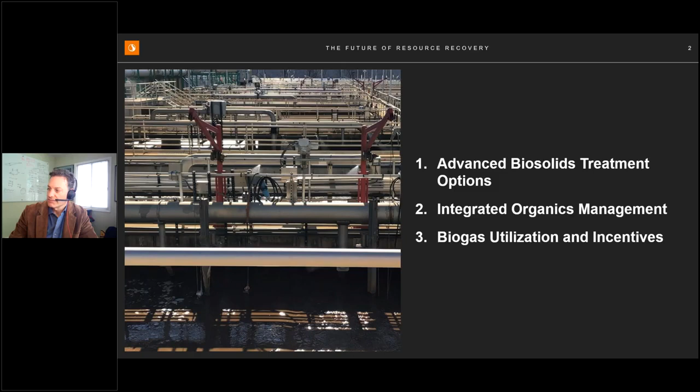Let me get to the right slide here. The topics I'll be covering include advanced biosolids treatment options, and then integrated organics management and biogas utilization and incentives market.

I want to start off with some common objectives we're seeing throughout our work on master planning and facility planning with utilities in North America and globally. One of those coincides with the topic of today's presentation: maximizing resource recovery. Within that context, achieving Class A options and looking for diversified biosolids end use options for sustainability.

Many of the utilities you operate are decades old at this point. There have been regulatory changes, capacity constraints, and many modifications over the decades, so there are space constraints, which is a common issue at these facilities. Finding space for new assets is typically challenging.

There's always the objective of ensuring effluent compliance, and understanding how the solid stream is impacting the liquid stream. Within that context, we're often looking at side stream treatment options to mitigate those impacts and ensure effluent limits are complied with and the system is as efficient as possible.

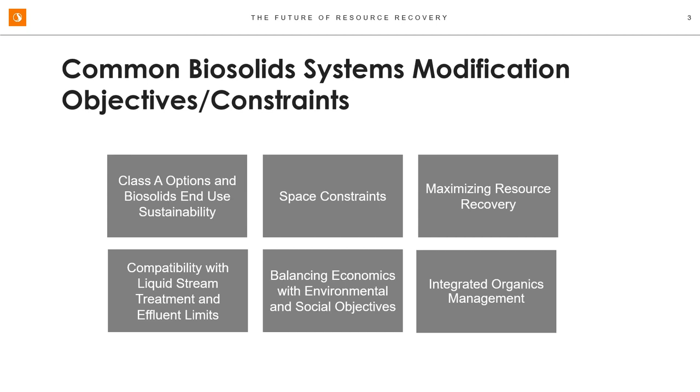As we'll get into later in the presentation, there's a very strong trend right now, some regulatory driven, some driven by the values and needs of specific urban areas, to integrate all organics, including the organic fraction of municipal solid waste like food waste, high strength industrial waste, fats, oils, and greases, and co-process those with wastewater residuals. In addition, looking at green waste that can be combined downstream as a bulking agent and so forth, for maximizing recovery of all organics.

About 12 years ago, I was involved in a Water Research Foundation study, 05-CTS-3, on waste solids reduction. At that time there was a really healthy market in pretreatment technologies looking at ways to minimize waste activated sludge and overall sludge volume by hydrolyzing material upstream. In that competitive market, many of those technologies have survived, and some have waned a bit.

What's really come to the surface over the last few years among pretreatment technologies is thermal hydrolysis and thermochemical hydrolysis technologies like thermal alkaline treatment. All of the advanced anaerobic digestion technologies are still in play for various drivers, including thermophilic digestion, biological hydrolysis or acid gas phase digestion, post-aerobic digestion, and a lot of interest, which I'll get into more later, in high solids anaerobic digestion intensification processes.

Also looking at combination processes like combining anaerobic digestion with thermal drying, composting, and thermal alkaline treatment downstream has become popular as well. We're seeing still incineration processes, also now being combined with anaerobic digestion. Post-thermal hydrolysis is something Cambi is working on now, along with emerging technologies like pyrolysis and gasification.

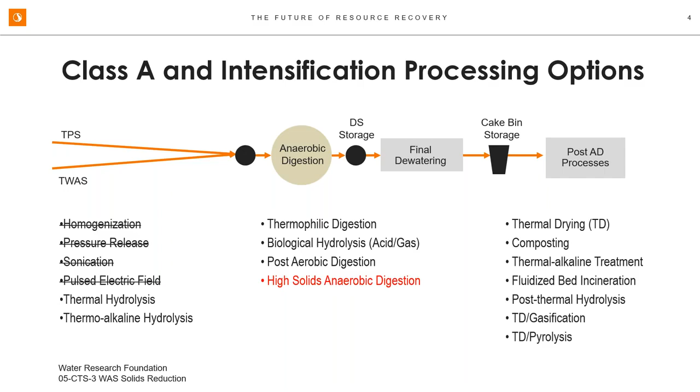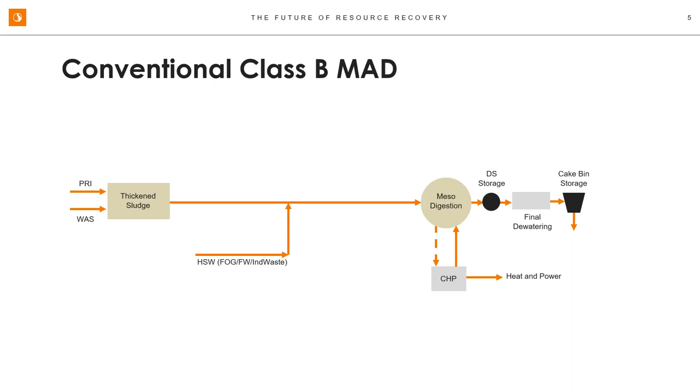Typically, a screening system is put in - a 6mm screen or smaller - to get the debris and so forth out of the sludge. A pre-dewatering step is required to get the sludge somewhere between 15 and 18% solids going into thermal hydrolysis, to optimize the heat balance within that system.

Downstream of the thermal hydrolysis process, dilution water is added to ensure that the TKN entering the digester is at an appropriate concentration to control the amount of ammonia in the digester itself. There's also a cooling step required - typically somewhere around 100 degrees Fahrenheit needs to be dropped from the system even after the dilution water is added.

The biogas can be used in a number of different ways, but if it's a combined heat and power system, the heat recovered off that needs to be converted to steam through a heat recovery steam generator to provide heat to the thermal hydrolysis system itself. This could require some supplemental fuel depending on the type of CHP system and the overall heat demand. Downstream of anaerobic digestion, there's typically a belt filter press dewatering system.

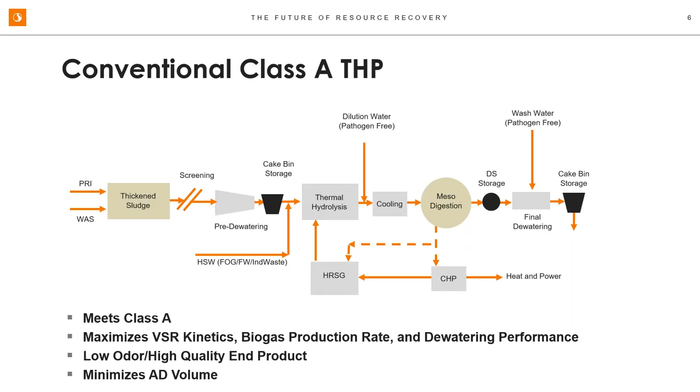This approach has shown to be very, very effective. It can reach Class A if all the sludge is thermally hydrolyzed. It maximizes the kinetics so we can minimize the digestion volume downstream, and the rate of biogas production is increased. The dewatering performance is significantly improved - we usually get somewhere around 28 to 30% dry solids from these systems, and the quality of the cake is very high: low odor and a very friable product. So it's a great process, but there's a lot going on with it.

To take an intermediate step towards thermal hydrolysis, many facilities are simply looking at maintaining a Class B approach to biosolids management, but getting more out of the digestion system through intensification via high solids anaerobic digestion processes - taking the solids typically from 3 to 4% feed concentration up to 6 to 8%.

That can be done quite easily upstream, but sometimes you could run into a viscosity issue getting that sludge into the digestion system itself. So chemical addition can be used to manage that. As I mentioned before, the alkalinity used in some of these processes does a very nice job of reducing the viscosity and potentially providing a little bit of hydrolyzing element to the process upstream. So that's one way to manage that viscosity.

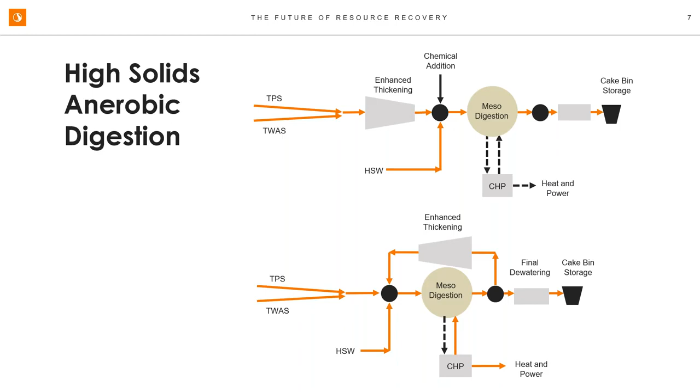Another way is through recuperative thickening, where you're essentially decoupling the solids retention time from the hydraulic retention time - recovering some of that digested solids, sending it back through a thickening process, typically centrifuges, and back into the digester so that you retain the solids. One nice aspect of this is you get a bit of a TKN ammonia purge out of that, so you can maintain a lower concentration of TKN within the digestion system to avoid any toxicity or inhibition.

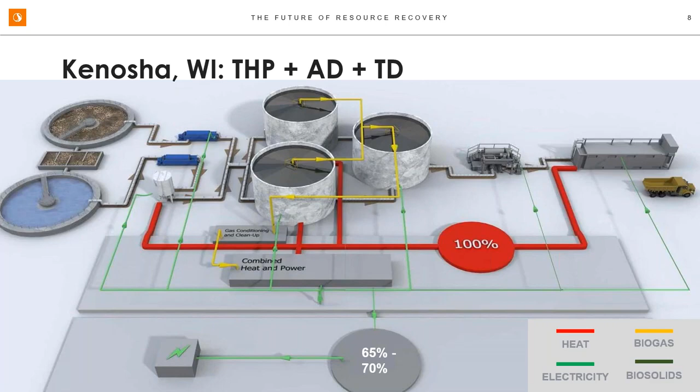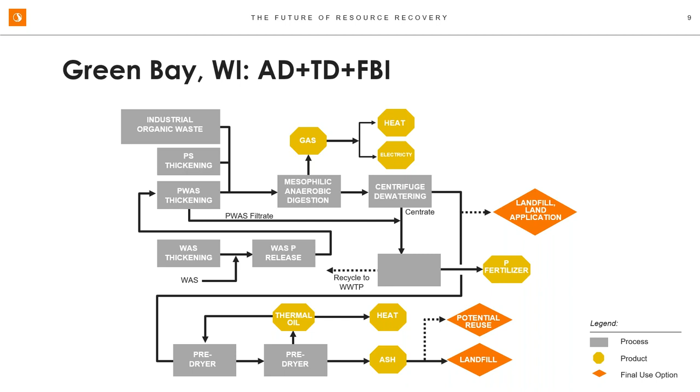Really innovative process. I'm impressed with that client and what they've done there.

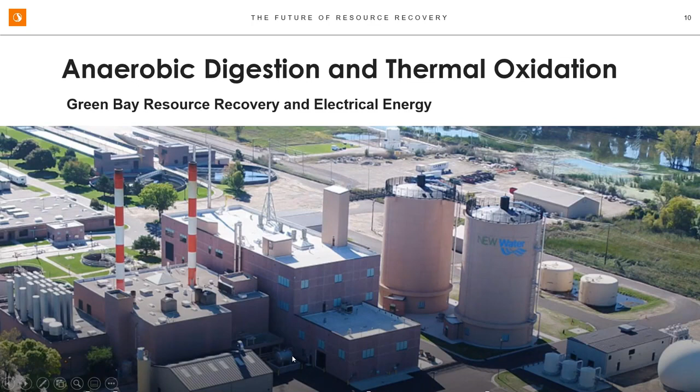This is an image of that facility. I was in charge of the pre-design of the anaerobic digesters you see on the right, and these are really state-of-the-art anaerobic digestion systems. They're silo-shaped units with a very high height-to-diameter ratio and a cone-shaped bottom, optimized for energy demand as well as energy production, and can stay in service for a long period of time based on the shape, which keeps grit out of them. In the center part of the diagram, you'll see the fluidized incineration system and the solids handling system itself.

Switching over to integrated organics management, there is a very strong trend in this. Some of it's regulatory driven — for example, in the state of California, for landfill diversion requirements, we're seeing a lot of co-digestion work in urban areas where landfill costs are becoming high, along with goals for renewable energy production and greenhouse gas reduction. We're seeing a lot more interest in integrated organics management. It's really the next step into the future of resource recovery for facilities, municipalities, agencies, and districts looking to continue improving their resource recovery aspects.

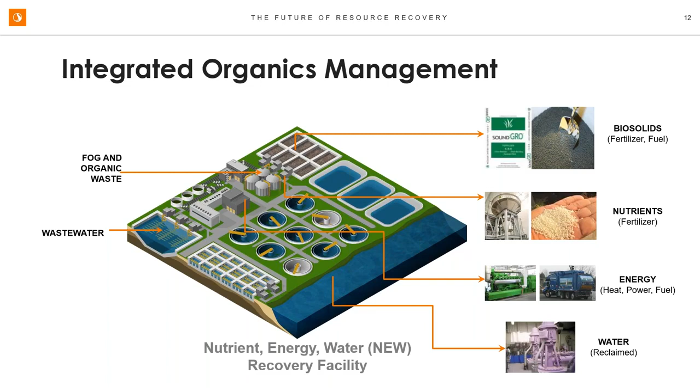Of course, this refinery in the middle is producing products at the end that include biosolids, nutrient recovery for fertilizer, energy production for vehicle and power production, as well as water recovery.

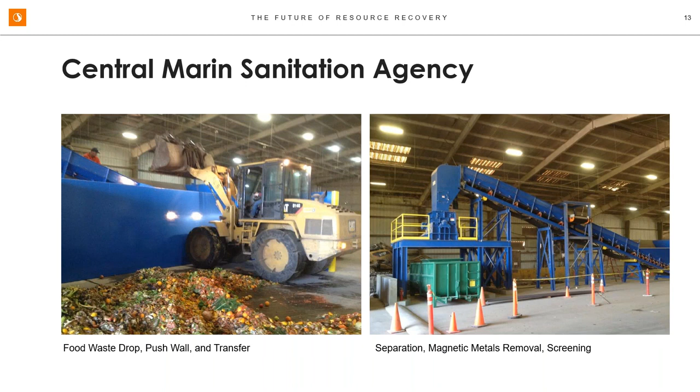I've got several images here of these systems, and what we're seeing now is the evolution where these pre-treatment systems for food waste pre-treatment are happening at material recovery facilities, separate from the treatment facility. This is one example, I'd say a 1.0 version, of a separation magnetic metal removal and screening system at the Central Marin Sanitation Agency. It's just down the street from the treatment facility, so all the pre-processing happens here, then it's transferred down the street and injected into the anaerobic digestion system there.

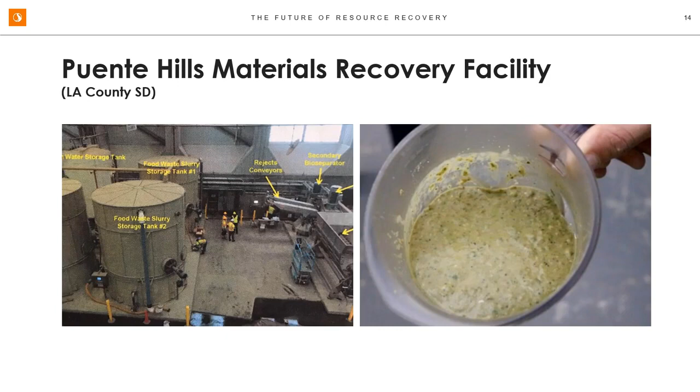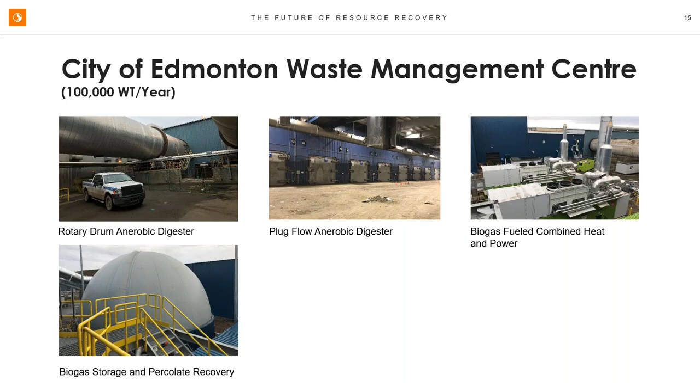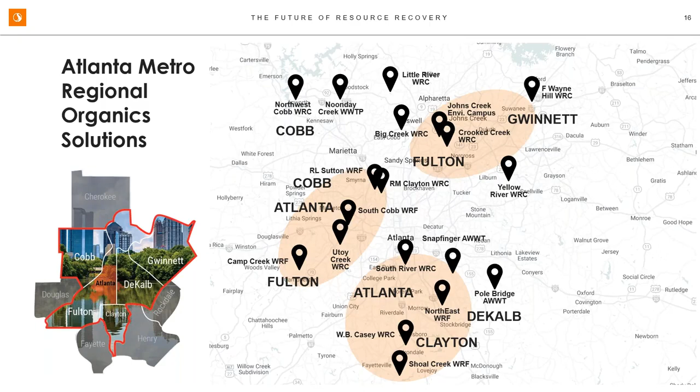Another good example: Stantec is currently, through program management services, examining a fully integrated organic system for Atlanta Metro. This is a good example of what's happening in a lot of these urban areas where landfill capacity is limited, prices are going up, and there's a desire to do something beneficial with the residuals. The city of Atlanta, along with accompanying counties and agencies, are looking at a regional facility that will co-process wastewater residuals with recovered organics from municipal solid waste, as well as high-strength waste and fats, oils, and greases. Because of the magnitude of this facility, there are a number of different treatment options.

In the center portion there, we're looking at modifying one of the facilities to include a thermal hydrolysis system. This is really where the energy is going to be produced through thermal hydrolysis, anaerobic digestion, combined heat and power, and there'll be a solar project associated with this as well. So a lot of energy being produced at that particular facility.

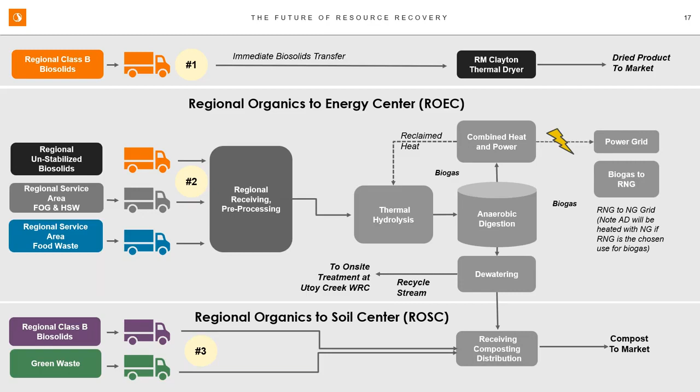Organics are planned to be recovered and transferred to a regional organics to soil center, where there'll be some composting of Class B material to upgrade that to Class A and have a diversified product.

The one thing that's very nice about this is that because of the diversification of the feedstock, as well as the treatment processes and the end products, it really provides a lot of flexibility to the management staff ultimately of what they can do with it. So we'll have a whole bunch of different types of feedstocks coming in. Management staff will choose where that goes and where it can be optimized in anaerobic digestion, a drying system, and a composting system, and optimize that to meet the market demands on the back end of that with a thermally dry product, a hydrolyzed anaerobically digested product, and then a composted product at the end of that. And those can be used independently or blended, with a lot of flexibility in that particular system.

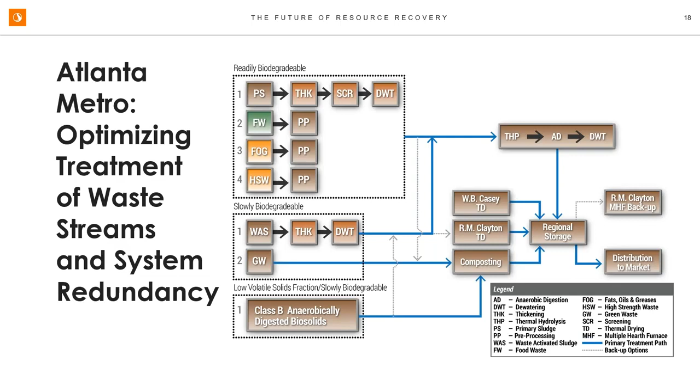Okay, last bit here is just on the biogas incentive market. We're seeing a lot of activity in the biogas incentive market now, and just want to give you a quick overview of that.

For these incentive programs, biogas can come from wastewater facilities or publicly owned treatment works. They can come from private commercial entities that include dairy and food and beverage companies, and also biogas from solid waste.

Of course, that biogas can be upgraded to produce power and heat through a combined heat and power system. And also the CO2 can be removed so that it meets a natural gas grade quality, and that can be used for various demands.

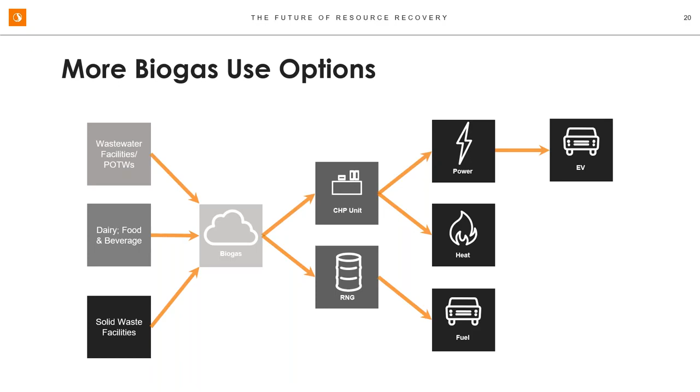For the incentive programs, though, in order to realize many of these credits, the fuel has to go to vehicles. So it either needs to go to an electric vehicle on the one hand, or it needs to go to a compressed natural gas vehicle on the other hand.

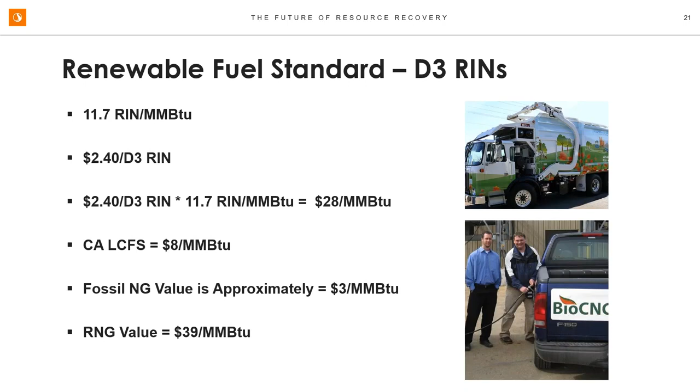We are seeing these RIN programs through the Renewable Fuel Standard, as well as the California Low Carbon Fuel Standard, incentivizing this. Based on the current incentive market, when you add up all of these incentives together, as well as the wholesale value of natural gas to go to a natural gas vehicle, the incentives are quite high. We're estimating that if you're able to get all of that and get an offtake in California, you're able to realize up to $40 per million BTU, which is very, very attractive, and the payback periods are quite short for those programs. So there is a lot of activity there.

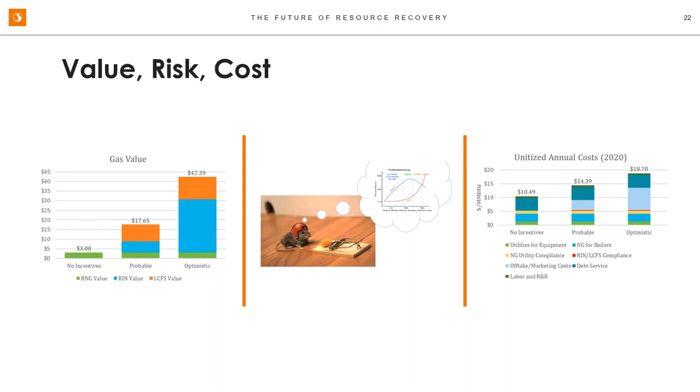The challenge for some of these public entities with a fiduciary responsibility to their ratepayers is it comes down to really the risks and uncertainties around the market, and if the incentives are going to be sustained, or if they're going to change significantly to change the economics, and that becomes a bit of a challenge. So we have been working with many of our clients on really educating them on those programs and running risk analyses to determine how they want to go forward and the best use of that gas.

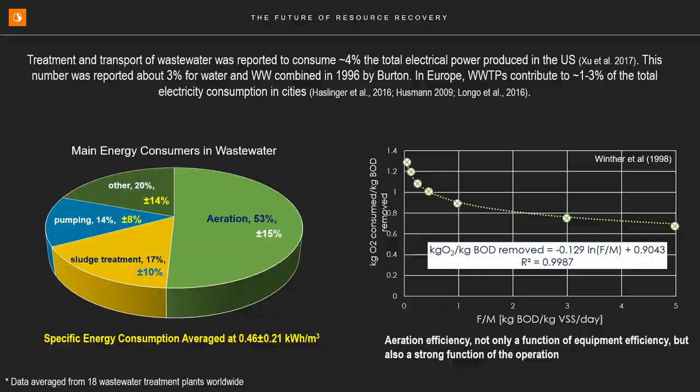Thank you, Drew. I'm wondering if you guys can see my screen. We could there, Mehran. We just lost it. Now we're seeing your Outlook. Can you see it now? Nope, we're seeing your Outlook now. Okay, Outlook. Oh, sorry. There you go, and hit that presentation mode button. There you go, sir. Perfect. Thanks. Thank you very much, Drew.

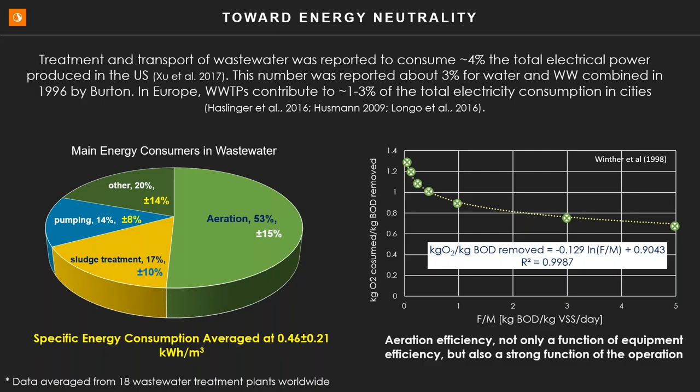In general, the specific energy consumption in a plant averages around 0.46 kilowatt-hour per cubic meter across many plants. That number can go as high as 1.5 kilowatt-hour per cubic meter. One question I'll have for the plant, maybe we can discuss this, is how much you guys use in your plant.

Thermodynamically, wastewater can have as high as 9.6 kilowatt-hour per cubic meter of energy within it. However, a big portion of it is not extractable. There are reports that up to 2.7 kilowatt-hour per cubic meter can be extractable, and the number I just compared, 0.46 or 1, is way lower than this, but it's still going to be difficult in some cases to really achieve energy neutrality.

The heart of energy neutrality, in my opinion, is carbon diversion, where we basically divert energy from the wastewater to the side stream instead of sending it to the secondary treatment, where we have to use a lot of energy from mechanical equipment and aeration. That process itself has inefficiencies and energy loss, and whatever converts to CO2 is actually energy loss.

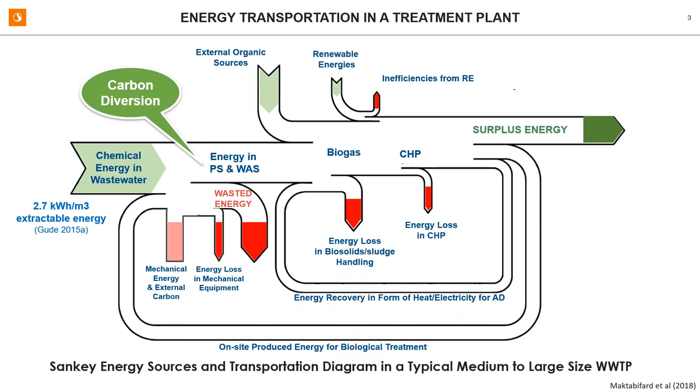In practice, there's no single recommended scenario for a plant to become energy self-sufficient. However, there are ways to approach it. One is reducing energy consumption within secondary treatment, which I'll talk about a bit. Carbon diversion is a big part of it. Process intensification via advanced automation is another. There are two slides at the end I'd like to tackle on this.

Side stream treatment is a very important part of energy neutrality—Dru talked a lot about that. Resource recovery itself helps reduce the load on secondary treatment, and obviously mechanical equipment efficiency matters. No matter what we do, if we have a very inefficient aeration system, it's probably going to be very hard to go that way.

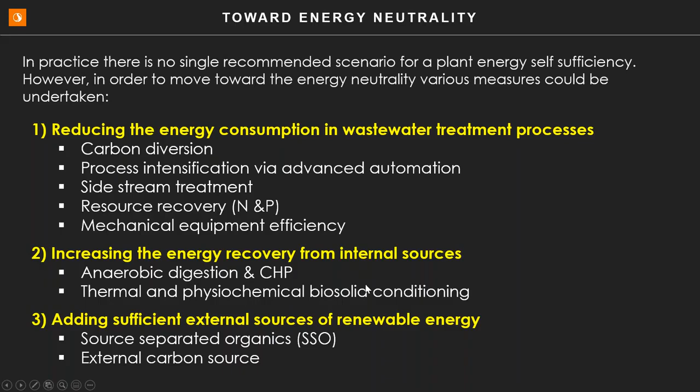Increasing the energy recovery from internal sources, how to boost the anaerobic digestibility by THP, and using CHP is a big part of the whole thing - thermal hydrolysis, and other emerging technologies such as pyrolysis that was mentioned earlier. In addition, the external carbon source will always add energy positive to a treatment plant. So we talk about the side stream.

In order to go over the practice we did here for Bonnybrook, I'll set an example that we did for one of the treatment plants in Maryland - that's WSSC in Maryland, which we designed, comprised of THP, anaerobic digestion, equalization tank, and a struvite facility.

After that, deammonification. This diagram really shows why we are doing these different technologies. We talked about THP digestibility, obviously for energy recovery and solid rheology. One of the reasons we use THP is actually to uniform and decrease the viscosity of the solids, and the other is through lysis, we're going to have a lot of purge of nitrogen and phosphorus that really boosts the phosphorus and nitrogen concentration and resource recovery downstream.

After that we're going to have struvite recovery. I understand that Bonnybrook, specifically Calgary, is very interested in this technology. I listed a couple of different technologies used here: Phospaq, Pearl, Magprex. These are the technologies we use for comparative evaluation for WSSC, for nutrient recovery, struvite mitigation, and load mitigation.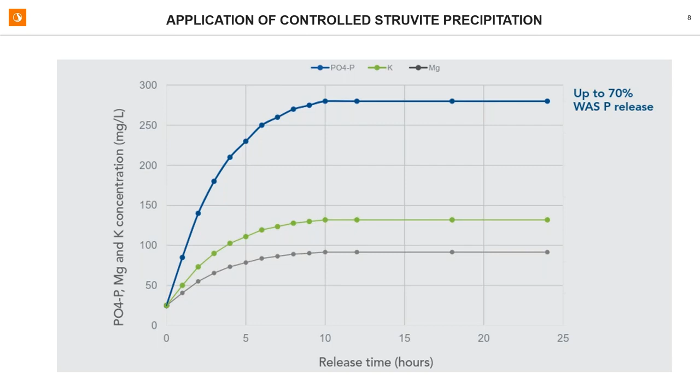AirPrex is another technology that works on the digested sludge. We actually designed and installed the largest AirPrex facility in Denver, and that is on the digested sludge.

The reactor is placed between the anaerobic digester and the dewatering of the sludge. We are not injecting alkalinity; instead, they provide higher pH values in order to fall into the KSP of precipitation of the struvite. They use aeration to strip CO2. When you strip CO2, the pH goes up and the precipitation of struvite happens.

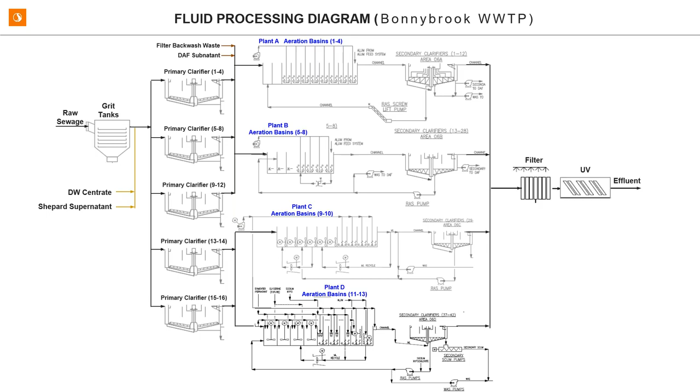When we look at the process itself, we know that we have plant A, B, C, and D, with some differences in configuration. For this analysis, we used plant D, which is the most recent plant under design and commissioning, and we compared how much energy we can save for plant D if we implement these strategies. The assumption was that whatever result we get is probably going to be a pessimistic comparison relative to A, B, and C, where we can even save more energy.

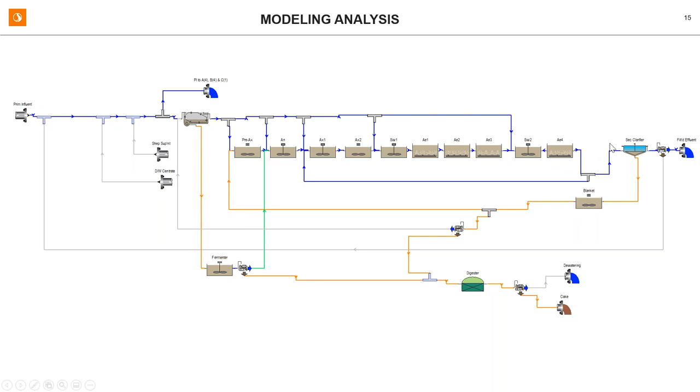This is the model that we use. It's a calibrated BioWin model, a steady state model, for Plant D. We basically assume that if we implement all those changes in the side stream, how that really impacts the effluent, the performance of the secondary treatment, and the energy consumption in Plant D, as well as the effluent quality, and we compare it with the existing data today.

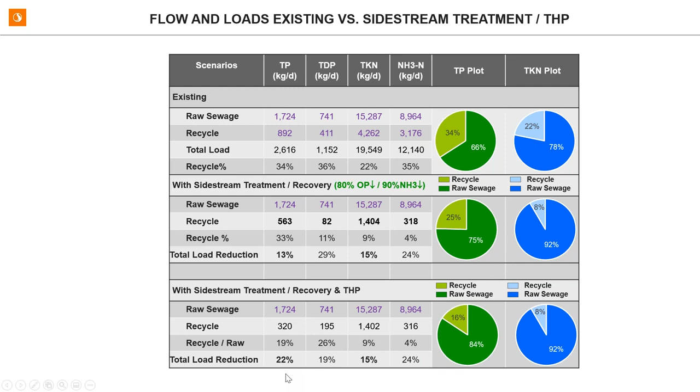If you implement THP in addition to the additional biogas we get, the most benefit on the nutrients would be on the ammonia and phosphorus side. We see that the total reduction will increase from 13% to 22%. That is significant for the secondary treatment.

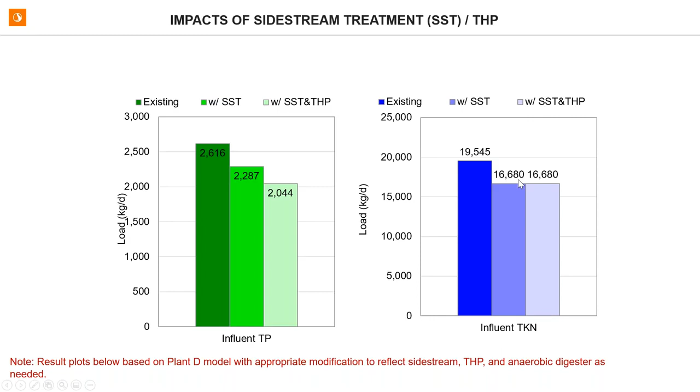The very same thing can be observed on the nitrogen side. We see it go from 19,500 down to 16,700 on the secondary treatment.

In terms of aeration requirements, we see a 15% reduction in aeration and 20% increase in biogas production via the implementation of THP before the anaerobic digester. So by implementing 15% reduction in the secondary treatment and 20% extra biogas, this is a significant step toward energy conservation.

But in a lot of cases, we do not really have the leverage of side stream treatment, and in some cases we have to take different approaches to move toward energy conservation. The main focus would then be on the secondary treatment itself, which depends on the compliance limits that we are exposed to.

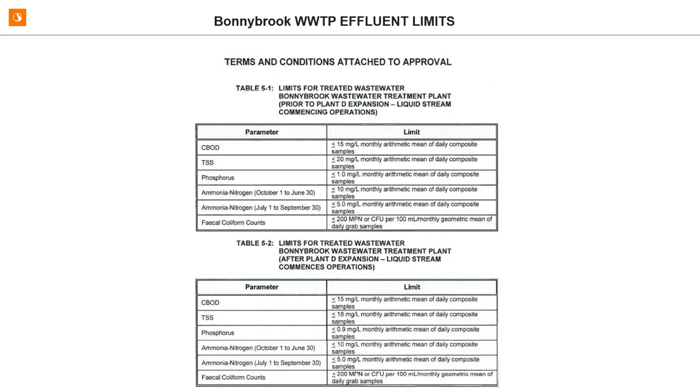In this case, we can take other approaches. I really want to mention this relatively new approach that's been showcased in a couple of full-scale plants: AvN aeration technology, which is ammonia versus nitrate, to intensify a process by promoting simultaneous nitrification-denitrification (SND) through the secondary treatment.

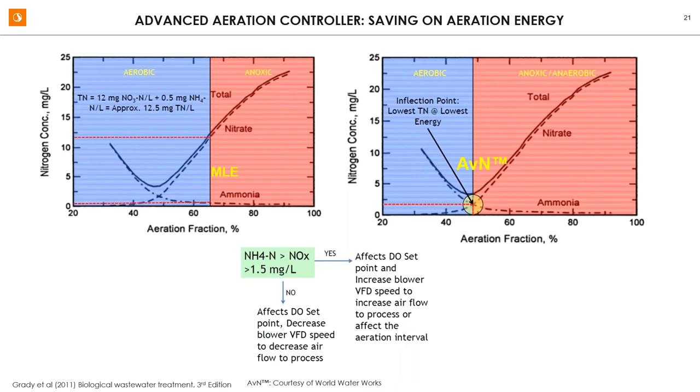If I go through this very quickly, it shows that when we have a very big aerobic zone, obviously the ammonia goes all the way to zero. When we increase the anoxic zone in a treatment plant, the nitrate goes lower, and there is a point where the combination of nitrate and ammonia is the lowest. That's exactly the point we use for advanced aeration - we just nitrify as much as is needed. When the ammonia is above NOx, we start nitrifying and aerating it, and when it's below NOx, we stop aerating it.

That would be basically the type of DO you'd have in the system instead of having a continuous DO of 1.5 or 2 or whatever ammonia-based control says. This is a kind of intermittent aeration. In one of the treatment plants where this strategy was implemented, they were able to save 25% on the energy side without really compromising the effluent quality. That happened in Florida.

The temperature was higher there, obviously. Every study, every case, every utility is different, and it has to be tuned accordingly. But this is a very good technology in order to intensify the process and reduce energy demand, and it could be implemented either with the side stream, or even in cases where a lot of plants don't have the benefit of having the side stream, as a means of energy management to be implemented in the secondary treatment.

So in summary, implementing THP, AD, CHP, resource recovery, and side stream deammonification processes reduces energy consumption by increasing the produced biogas and reducing the nutrient load to the mainstream by a great degree. THP itself increases biogas production by 20%, which is significant. Side stream deammonification is a very effective way of intensifying the treatment by reducing the nitrogen and phosphorus going back to the head of the plant.

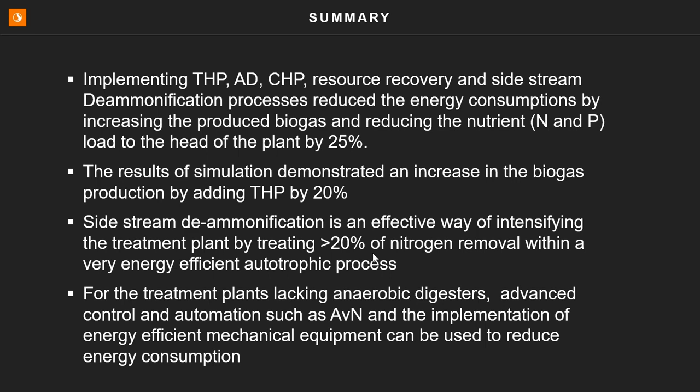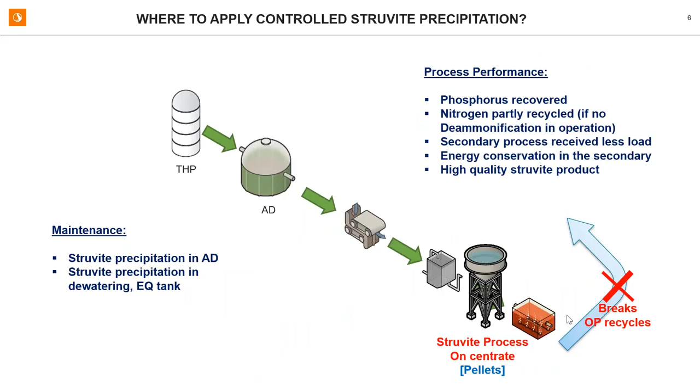Is deammonification the front-runner technology for side stream treatment? Yes, deammonification is basically the general name for all of them. As I mentioned, there are different technologies, I didn't go over them for the sake of time. What we analyzed was the comparison between ANITA Mox, DEMON, and AnammoPAQ - these are the 3 main technologies with the most installations. There are 2 newer technologies called AMX and ZeeNAMMAX, basically by Tomorrow Water and by Suez, very much based on the MABR technology. You may be familiar with it, but these are still on pilot scale. We have 3 technologies at least with multiple full-scale installations, both in North America and around the world, and all of them are called deammonification. In this case, what we did was the Hybas ANITA Mox process.

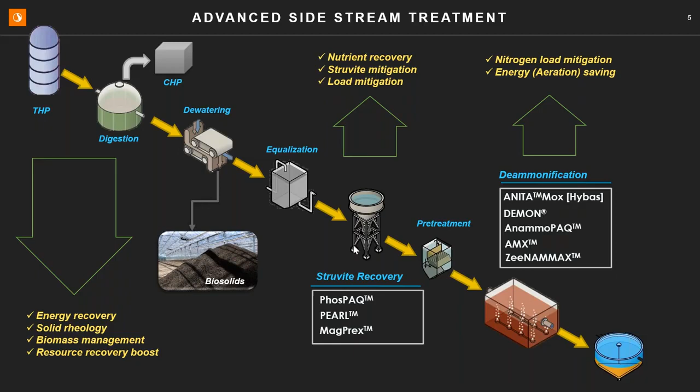Without co-digestion, what's the maximum boost you can get in biogas with hydrolysis? It's going to be really site-specific, dependent on the size and loading rate of the digester. Hydrolyzing primary sludge isn't going to give you much of a boost, but hydrolyzing the biological sludge or waste activated sludge has shown to make it significantly more biodegradable in the downstream anaerobic system, especially when the existing SRT in the system is 20 days or less. If you're running a very long SRT, say 30 days plus, and you implement a pretreatment process like thermal hydrolysis, you're probably not going to see a big increase in VSR and biogas production. If you're running a short SRT, maybe 20 days or less, and you implement THP, you'll likely see much more significant benefit. We typically plan on maybe a 20% bump in VSR in the WAS. So if it's a 50-50 loading rate on WAS and primary sludge, you might see an overall 10% benefit on VSR and biogas production - that's typically what we plan on, a modest increase.

When you combine it with the other benefits is really where you start to see more bang for the buck on the handling cost downstream, due to better dewaterability and better reuse options downstream.